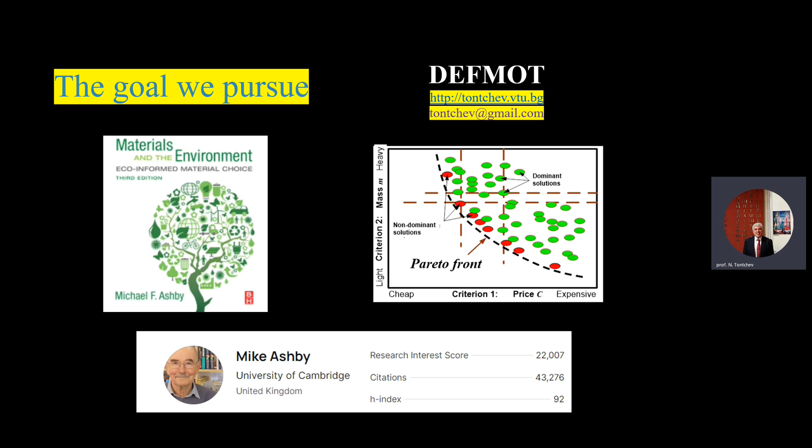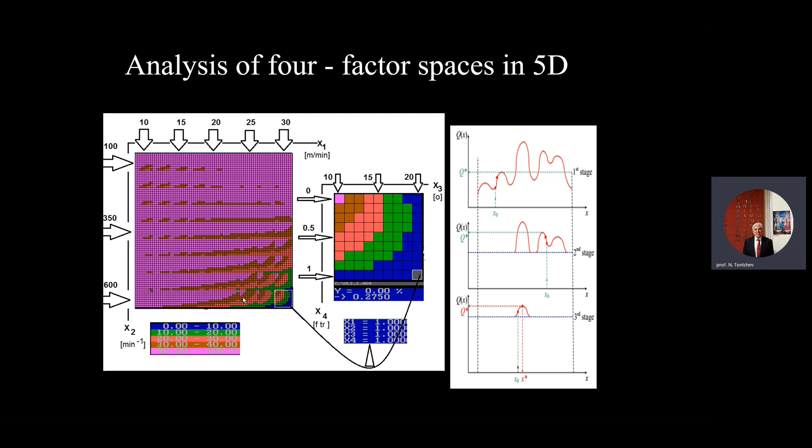Professor Nikolai Tonchev's idea is to create videos in which he submits his experience to the ideas of Professor Mike Ashby from the University of Cambridge, who is a well-known scientist on the choice of materials in the development of structures. We propose to appropriately transform the 5D space for the purposes of management in the plane, and thus the decision maker can do analysis, optimizations, and everything he needs.

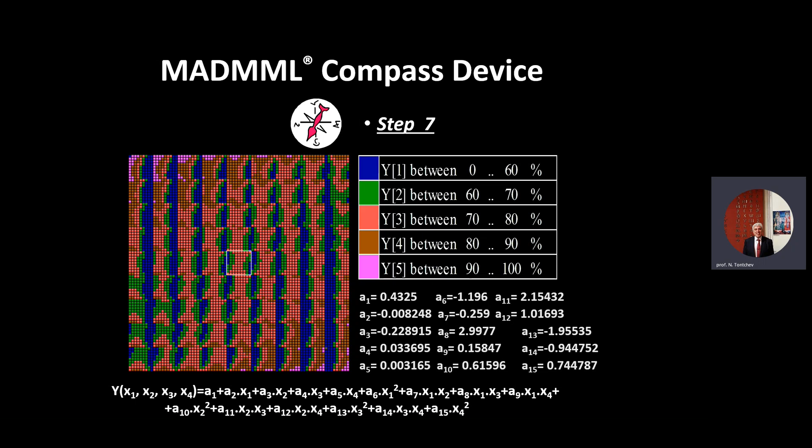Let us now see a complete identification in the management of one of our goals. This is one demonstration in 11 steps of the same research object moving from its minimum to its maximum.

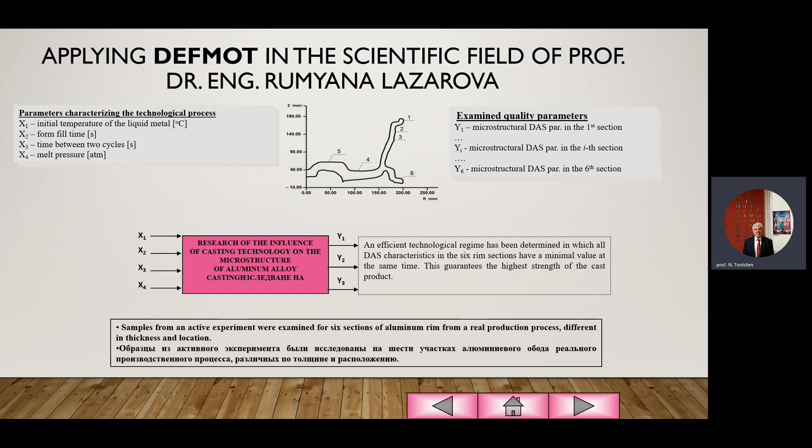Our confidence to make such a funding proposal is rooted in the experience we have gained in managing 5D technological processes. We have examined the casting process of automotive aluminum wheels and rims, proposing a mode providing the best strength in 6 controlled sections. For the properties of cast aluminum rims, in the process of heat treatment, we have gained experience from a European project on Copernicus when implementing the results in an American wheel manufacturing company.

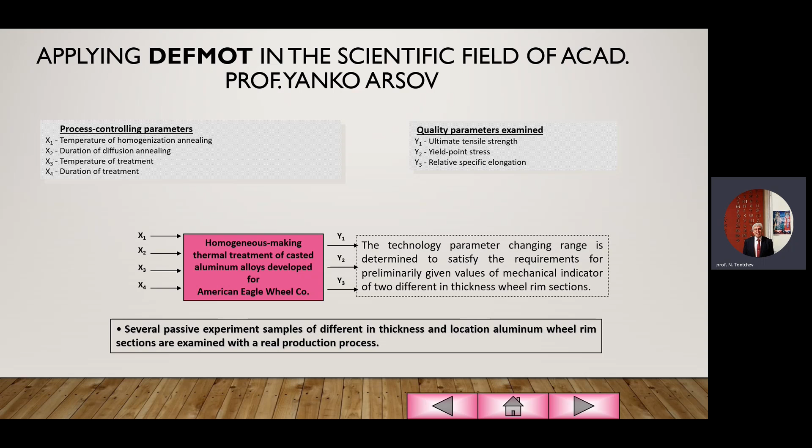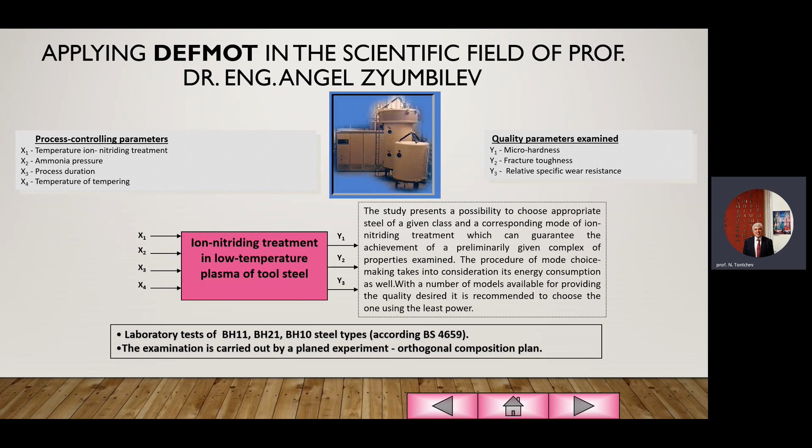We have considered the process for strengthening coatings for military applications such as electrolytic coatings, in ion nitriding with hardness and wear testing, in plasma layering examining adhesion and porosity. Technological experience in implementing magnesium alloys for joints from medicine was gained through a project with a university in China. Here, for the first time, completely incompatible factors such as chemical composition and processing mode were examined.

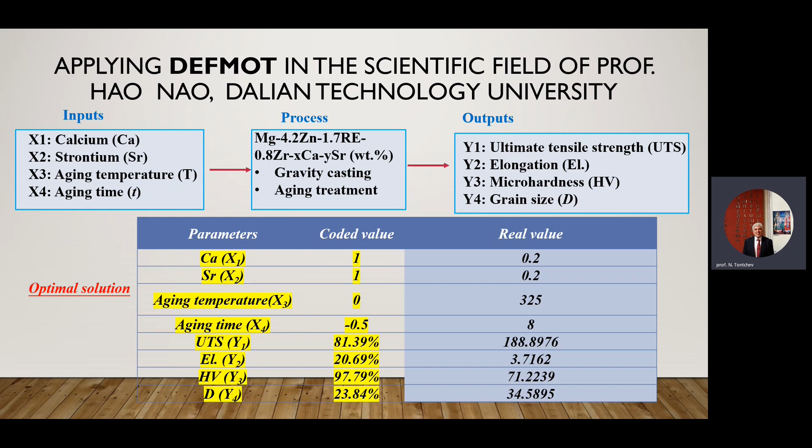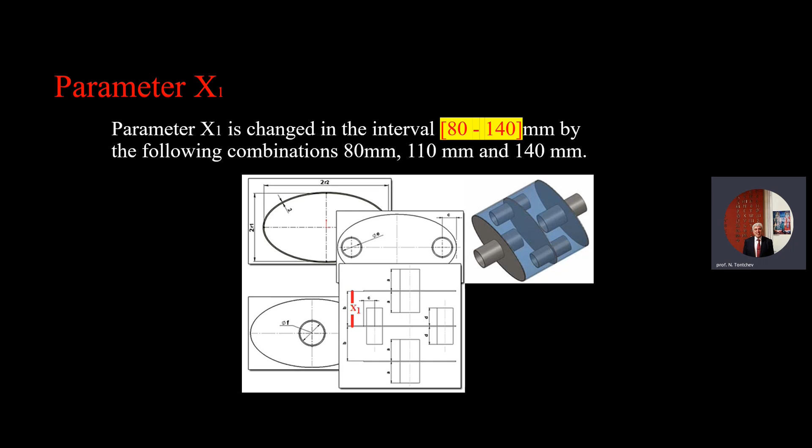And now follows an educational application of this theory, which is related to the design of the exhaust structure. According to the 4 design parameters of this mixer, how can a design optimization be made that exactly fulfills desired integral criterion values? We successively vary parameters of the construction, such as x1, x2, x3, and x4.

With the boundary values of these 4 parameters, the combinations that will be built with the CAD system are defined, and these are actually the rational combinations through which the solution itself will be sought. It can be seen that the combinations are 15 in total.

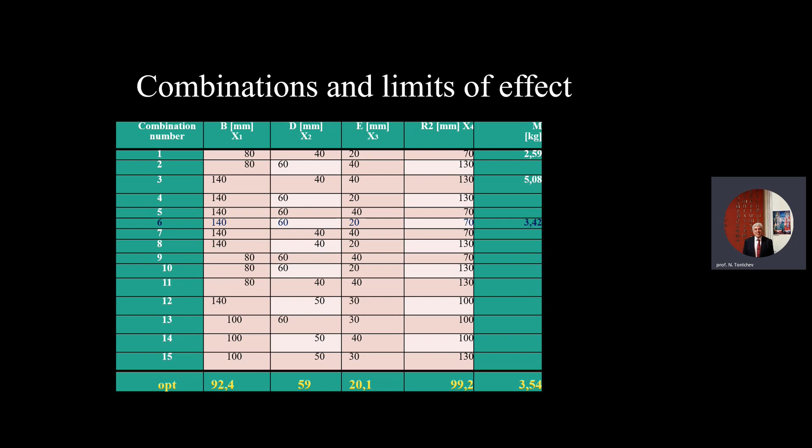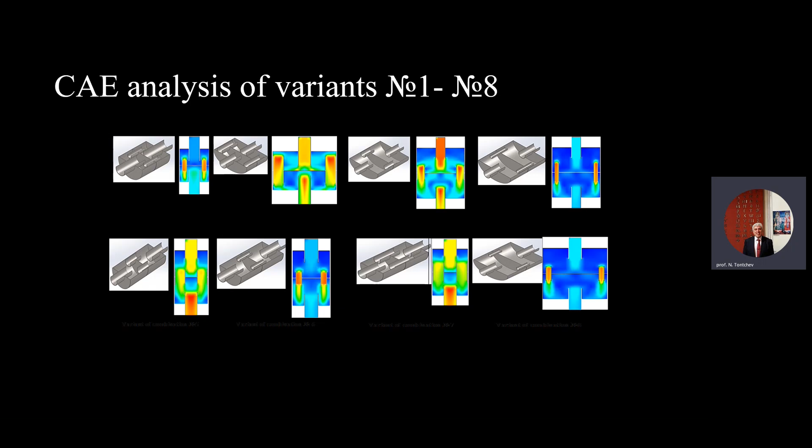The different constructs were tested on fluid analysis, and the result is shown on the slides for options 1 to 8, for variant 9 to 15, and the optimal variant.

Based on the data, a regression model was obtained with the help of which the optimization calculations are made. These are the results of the fluid analysis.

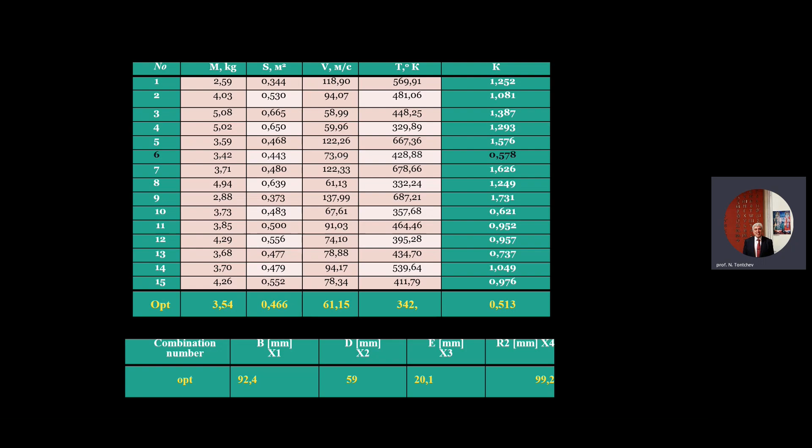Based on this already defined task and on the defined design parameters and criteria in the specified table, a model can be derived by DevMod, which can then be visualized in 5D.

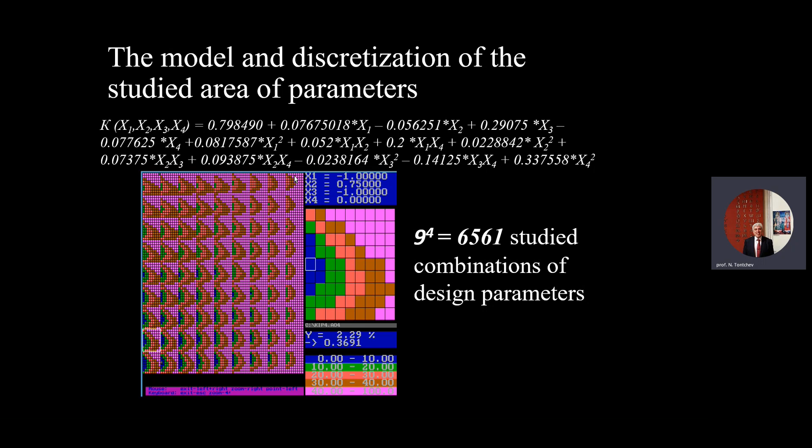The idea of the input data of the fluid analysis is borrowed from the Russian colleagues, but through the DevMod approach, we have determined solutions characterized by a more optimal integral criterion. With this, we trace the technology of the reached solution using our DevMod approach. For the proposed numerical solution, a check with a fluid module of the CAE system should be applied.

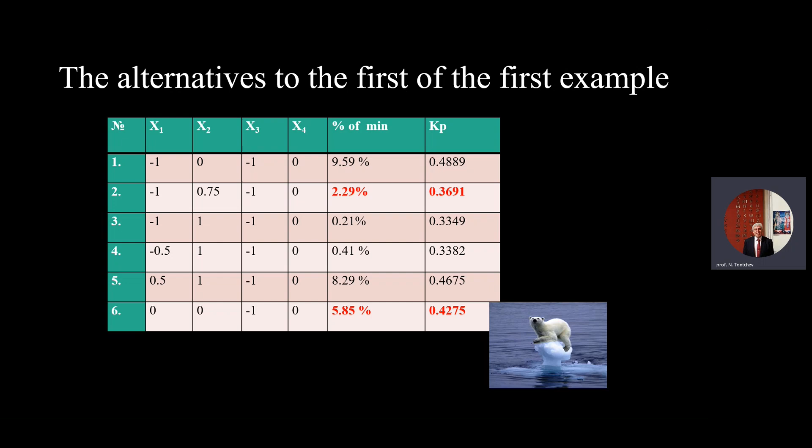Respectable experts of foundation Dassault Systèmes, this is the idea of the project, which will be implemented with the example of material science and mechanical engineering, because this is one of the specializations of the Transport University applying for funding.

The project description lists the names of the main educational videos with a short annotation to them. The monograph is a completed work of the project idea. The project manager can redesign the training videos at the suggestion of the evaluators in case the idea is accepted.

The contribution of the funding organization is that by approving this project, it can create an environment for the creation of a similar software application in which part of the team can be invited as experts after the seed of knowledge has been disseminated, or more precisely, sown.